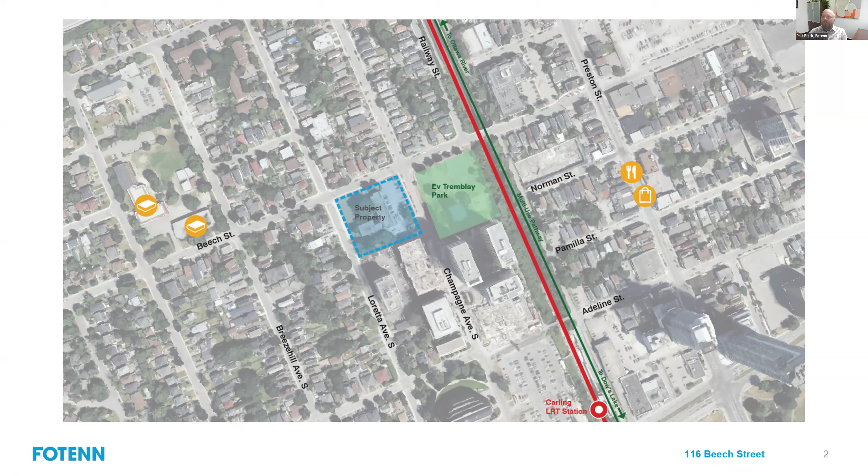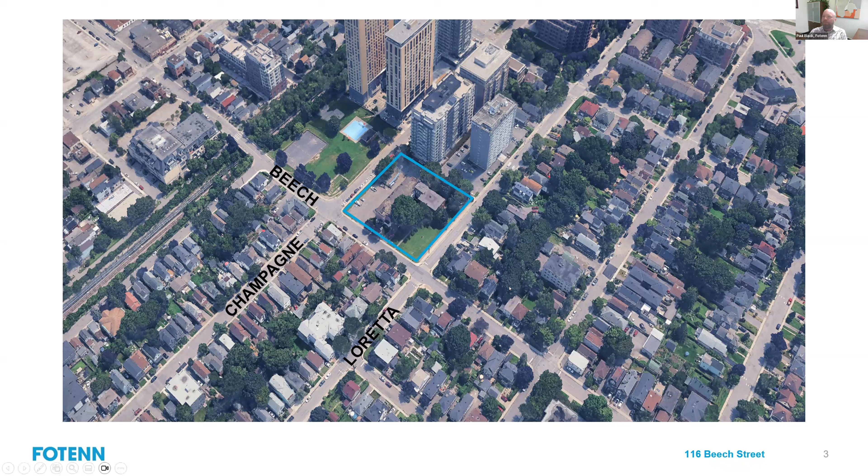Here's an aerial view of the site, just to give you a bit more context. In this case, south is to the top of the image, north is to the bottom. So we're looking towards the new Civic Hospital and the Carling transit station. You can see the recent developments along Champagne and the older high-rise along Loretta, which are just located south. And obviously you can see Ev Tremblay Park as well.

So in terms of the planning context for this application, I'm going to run you through that and a little bit of the rationale, and then Ryan's going to take you through the actual design of the project, and then we can open it up for questions. In terms of planning context, this site is located in the downtown core transect, which extends as far west really as Preston and these transit station areas. It is designated as hub in the official plan with an evolving overlay, which is that sort of confetti over the map.

The hub designation within that downtown core transect permits high-rise buildings, so that's up to 40 stories in the city's official plan within a 300-meter radius or 400-meter walking distance. It requires a minimum building height of 4 stories for any redevelopment. This site is about 270 meters from the nearest transit station, so it does meet that criteria for high rise.

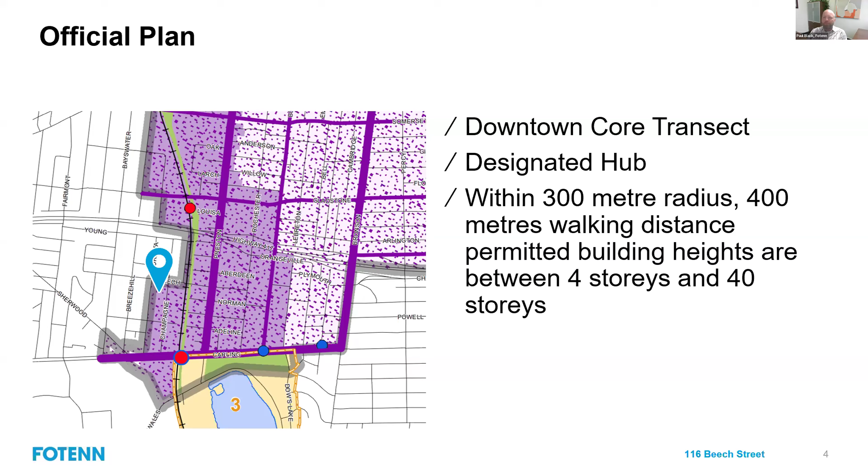But that's not a blanket permission. It requires that we meet the urban design objectives of the official plan as well, which speak to transition into the neighborhood. I'll circle back to that in just a moment.

An additional layer of policy in this area is the West Downtown Core Secondary Plan. Previously this was a more localized secondary plan, but as part of the official plan update in 2022, several plans were merged into one document called the West Downtown Core Secondary Plan. That 2022 update didn't really update any of the policies of those secondary plans. It changed some language to ensure references were correct to hub and that sort of thing, but there was no real hard look at the different plans to ensure that they aligned or conformed to the parent official plan.

So in this case, the site, you see it on the map here. This is an excerpt of the height schedule from that secondary plan, but it is within what's called the Dow's Lake Station District and within the hub area.

And the current permissions would allow heights up to 6 stories. So this brings us to the first application that's been submitted to the city, which is an official plan amendment to amend the secondary plan. It's not seeking to amend the parent official plan. The amendment to the secondary plan is rationalized by the policies of the parent official plan, which permit the greater heights.

But key policies of the official plan are to maintain transition to the low-rise neighborhoods, in this case to the west and to the north. You can see that blue dashed line that runs along Loretta and Beech. That's the neighborhood line in the secondary plan, and that's really intended to ensure that there is a proper transition from the neighborhood to this hub area, recognizing that it's going to be a denser, more developed area.

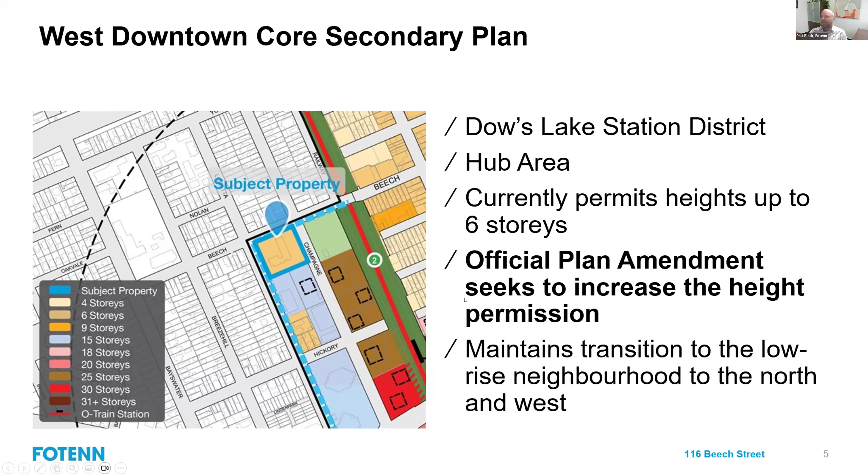In terms of the zoning bylaw, we submitted in December, so technically we're under the old zoning bylaw, which is 2008-250. Some of you are probably aware the city council just adopted the new official plan earlier this month, and the new zoning bylaw earlier this month, and it is now in its appeal period, so it will be coming into force at some point over the next months. But in the old zoning bylaw, the property is zoned R5B with a height maximum of 18 meters. That's what that R5B H18 stands for.

This brings us to the second application, which is a zoning bylaw amendment that's seeking to permit the greater building height, which is 25 stories in this case, ensuring those stepbacks for the transition through the zoning, and through a site-specific schedule that would dictate where height is permitted and what heights are permitted where. So amendments proposed include height as the main one, but also rear yard setback, which is along the south property line adjacent to 90 Champagne and 285 Loretta. Also adding permissions to permit retail use, which Ryan will speak to, but there's a small area allocated for some retail use to activate the park space.

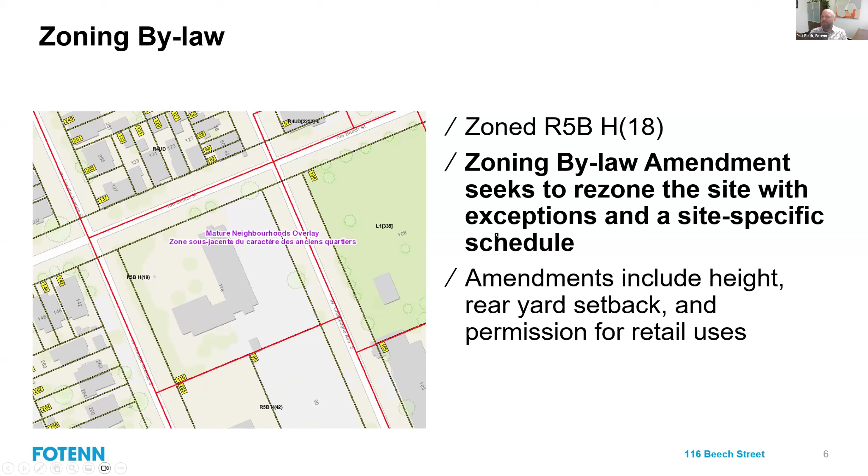In the new zoning bylaw, the zoning would still require an amendment and would still be amended through the zoning bylaw amendment, but the new zone has it as a Hub 2 zone, which is H2, with a maximum height of 20 meters - again recognizing 6 stories in the secondary plan, it was zoned for 20 meters. You can see the neighborhood to the north and west is zoned N4B, which is N4, a mid-density neighborhood, with the B subzone, which has higher lot coverage and smaller setbacks. It goes A to E, with E being the least dense and A being the most.

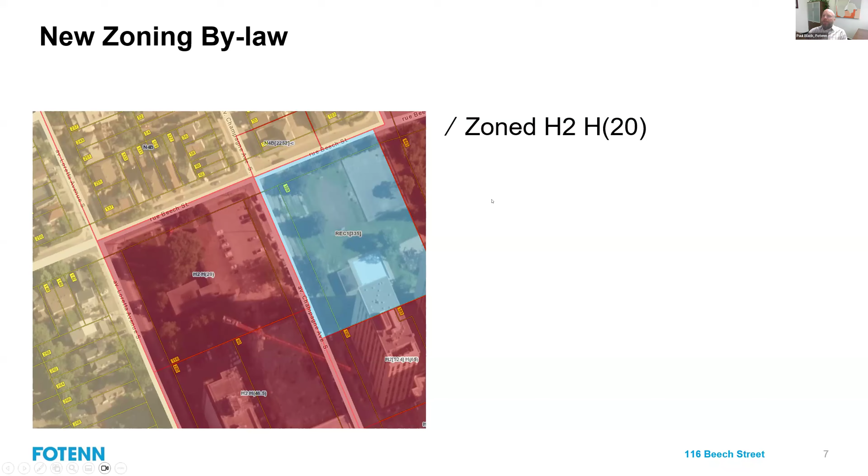In terms of key statistics, Alice mentioned some of these, and we're happy to revisit these as we go tonight. Overall, 392 units are proposed. This includes 5% large dwelling units, which the new zoning bylaw has defined as 3-bedroom or 2-bedroom plus den units that are 80 square meters or more. So 5% of the units within the building do meet that 80 square meter criteria.

And then the building height is 25 stories or a height of 78 meters. You can see here, and again Ryan will walk you through this, but not the entire site is 78 meters - the tower and the greatest heights are 78 meters.

113 resident parking spaces are proposed with 30 visitor parking, which does conform to the bylaw. And 204 bike parking spaces are proposed, so just over 0.5 per unit in this case.

And then there is a square you can see in the top right-hand corner. That's a public parkland dedication. Ryan will speak to that a little bit more, but it does represent 10% of the site area. It's been located in that corner to play off of Ev Tremblay Park and offer potential opportunities to animate the space with activities happening in one park or the other. That represents 498 square meters.

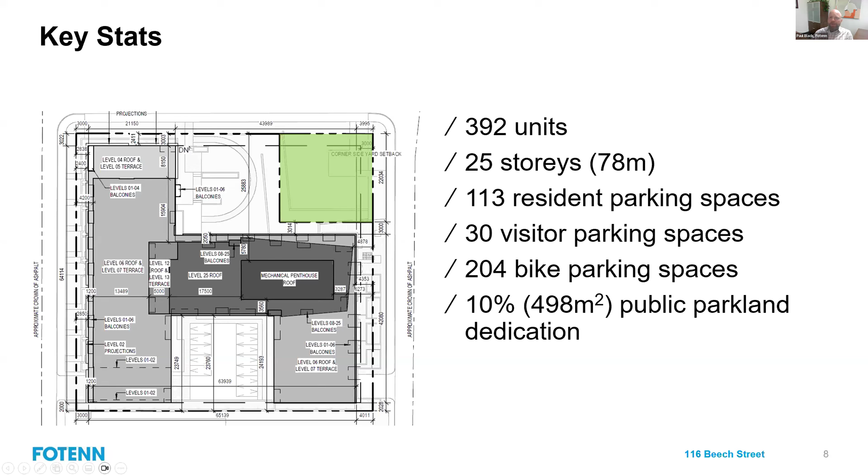So that will be a future process that we'll have to work through if the official plan and zoning bylaw amendment are approved. With that, I'll leave it there, and I'll pass it over to Ryan, who will walk through the design of the project. Thank you.

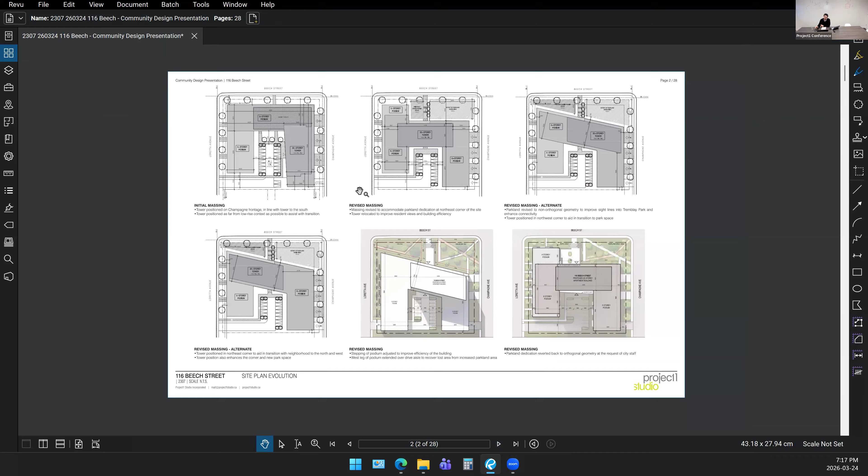I just want to start by going through the iterations we've taken of the project and how we've arrived at the current massing. So again, understanding where we are, understanding that we've got lower scale development to the west and to the north, our original proposal was a tower very much along the Champagne Avenue side, kind of abutting the tower that's gone in at 190. That's very much symmetrical and in line, and then imagining this building would kind of step down as we went around the corner, trying to the greatest extent possible to be respectful of these separations to the north and to the west.

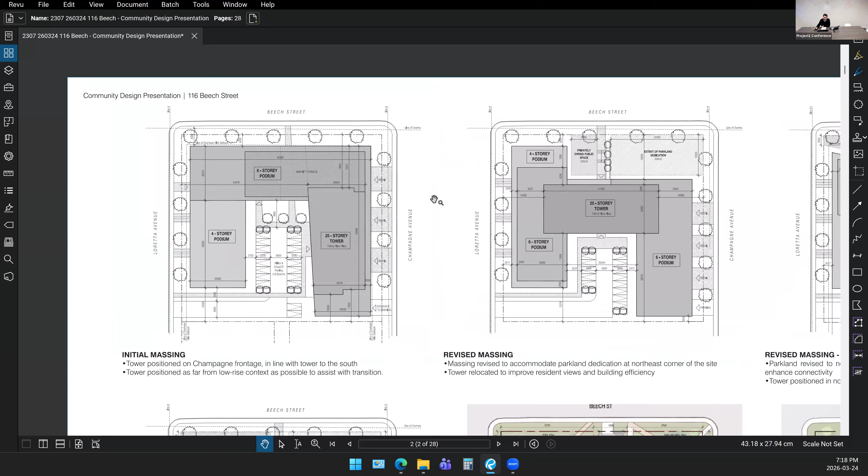But that got thrown for a loop once our initial meeting with the city happened, and there was this desire to pursue a parkland dedication at the corner, which changed the massing strategy around - we now had to provide space in front of the building along Beech Street, which rejigged how we could get the mass to work. So in this version we had a 25-story tower very much centered, rotated and centered on the project, on the lot.

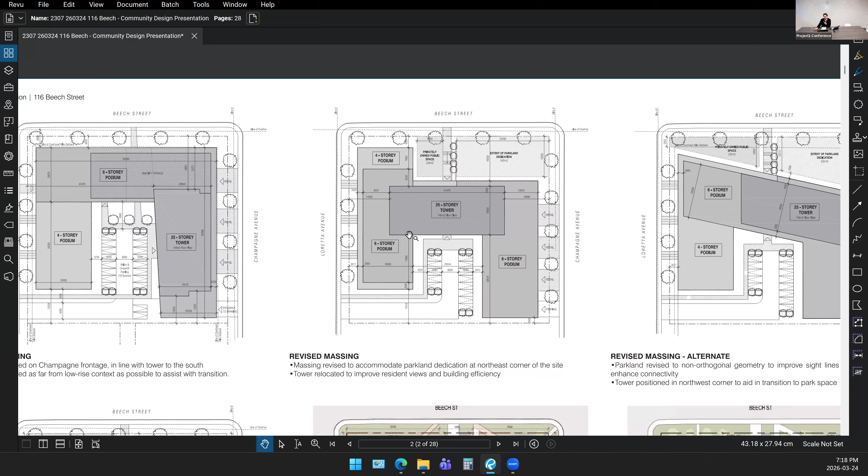And then we moved past there thinking, if this parkland is really about creating connections and links into Eve Tremblay Park, perhaps we don't need to go rectangular. Perhaps we could go with a diagonal or a skewed proportion so that it could help create this almost false perspective to open things up towards the park space.

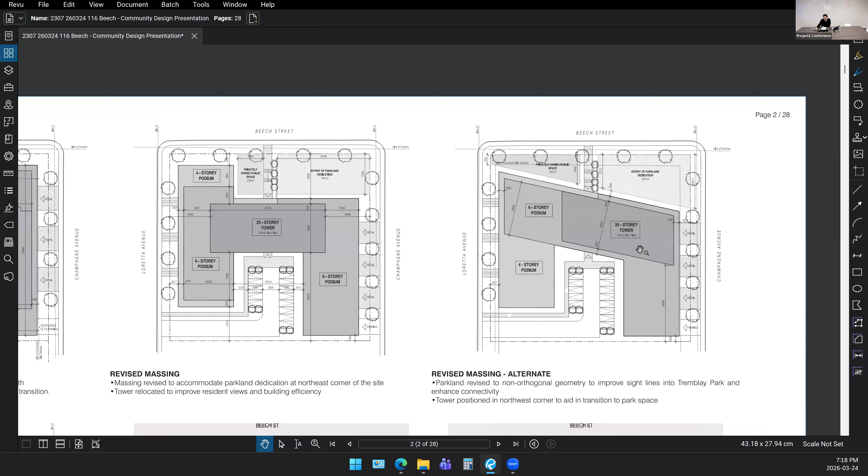And so we developed this idea, and this also allowed us to shift the tower a little bit further to the east and increase that separation. We actually pursued that quite a bit, ultimately to have this turned down by city staff over a preference for more rectilinear and square shapes for this public space. So that kicked us back to a shape closer to where we started from.

Flipping forward, we get this massing, which is the current condition of things. We've got almost like an H-shaped podium, and this is 6 stories in gray, what you can see here. Then we move up from there into the tower levels, so this dotted line represents the footprint of the upper levels of the building.

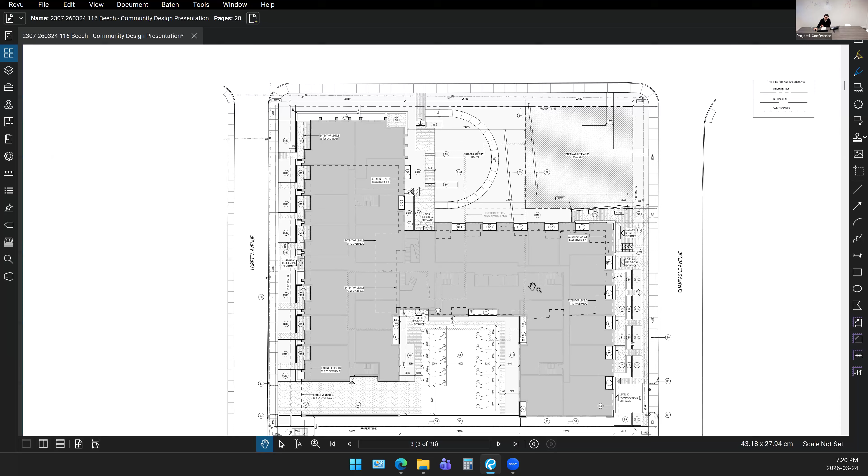Being mindful of our context, we have over 20 meters of separation from our property line to the edge of the tower portion of the building as we go to the west, which is double the separation requirement under the tall building guidelines, and even greater separation going to the south. As we translate to the north, we've got this entire parkland dedication, separating the tower and Beech Street and the lower rise community to the north. So we're really doing what we can to position this tower as far from Loretta and from Beech as possible.

We're also being mindful of things like the transition and change in grade that this project experiences. So the Champagne Avenue elevation is over a story lower than Loretta. We get this transition in height that happens along Beech Street, and as we go up Beech, we're climbing over 3.5 meters.

So what this means is that our parking entrance, the access to all of the covered parking, underground parking, garbage service, access to bike parking, it's effectively underground, but we don't need to go down a ramp to get there because we're at this lower level when we go through here.

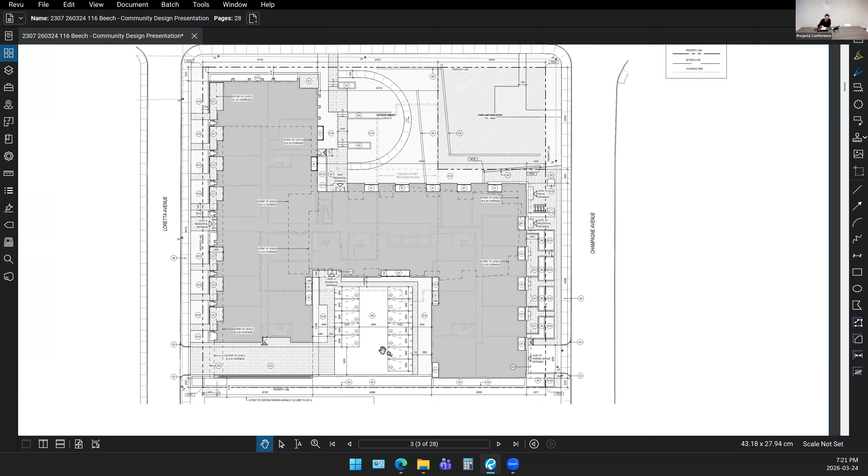And then we have an inner courtyard that we're providing here off of Loretta, so that all your Ubers, your visitors, your drop off and pickup, they aren't parking on the street. They aren't taking up parallel parking spaces on Loretta. They're able to come into the site. There's a number of parking spaces in here, and that's where your short-term parking can take place. We're not creating these bottlenecks along public streets that get even worse during the winter and even this time of year.

The other thing we're managing, besides the change in grade and the parkland dedication at the corner, is that we're also not developing this portion of the building. This is the 10% parkland dedication that we're providing. We're nearly doubling this green space dedication in front of the building with the way that we've decided to move forward with the project.

So there still is a change in grade here. From a public approach perspective, we're seeing this being a nice long processional route that allows for benches and a nice landscaped element, and then an interesting curved element here for a barrier-free ramp to provide access up to the main entrance. But the nice part about this as well is that we won't have building underneath the majority of this.

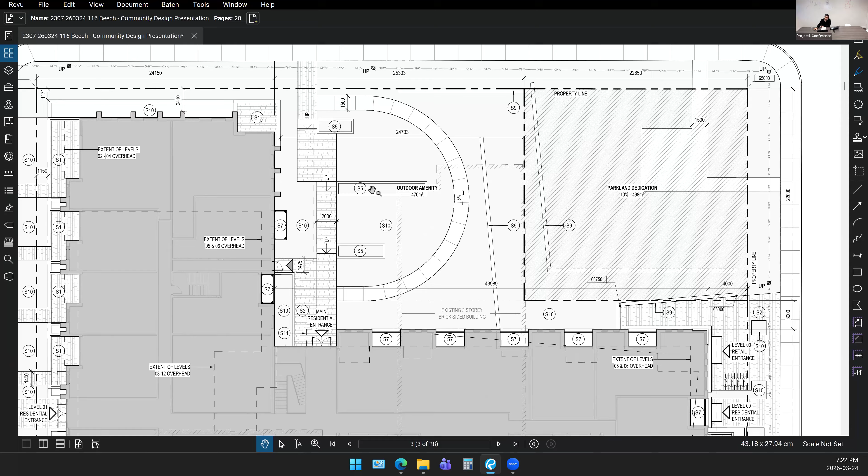So we were actually able to provide sufficient soil volume to provide adequate tree planting for this area. It won't just be shrubs that we're able to plant in here, we'll actually be able to plant some significant sized trees to really soften this edge and provide real canopies, actual shade, and really create a unique pedestrian environment in this soft landscaped area in front of the building.

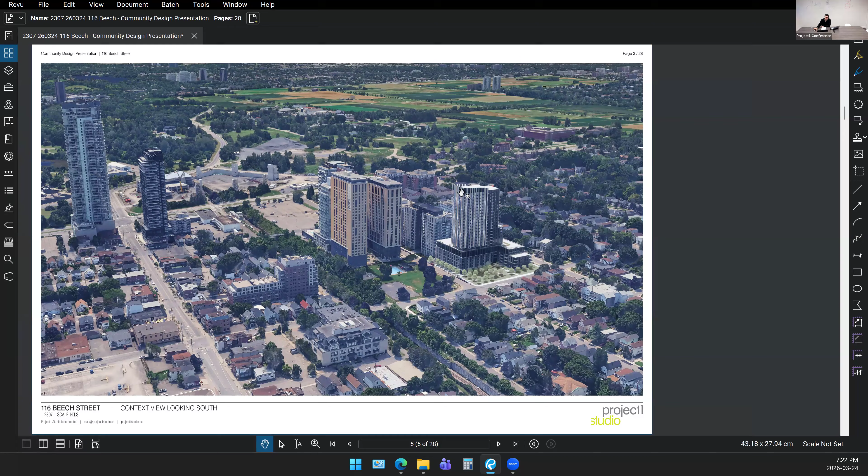Moving on from there, these are stats, we can go back to these if we'd like. We've done some analyses of the building in context. This is in existing context, we all know that there's tons of planned context for this area as well. But we can see here that green area in front of the building, the massing of the building in relation to the existing two MB towers that are here already, the abutting property to the south. We can see that in general, while this is more height, this certainly isn't outside of the norm, this certainly isn't out of keeping with the type of development, the type of density that we've already seen in this neighborhood.

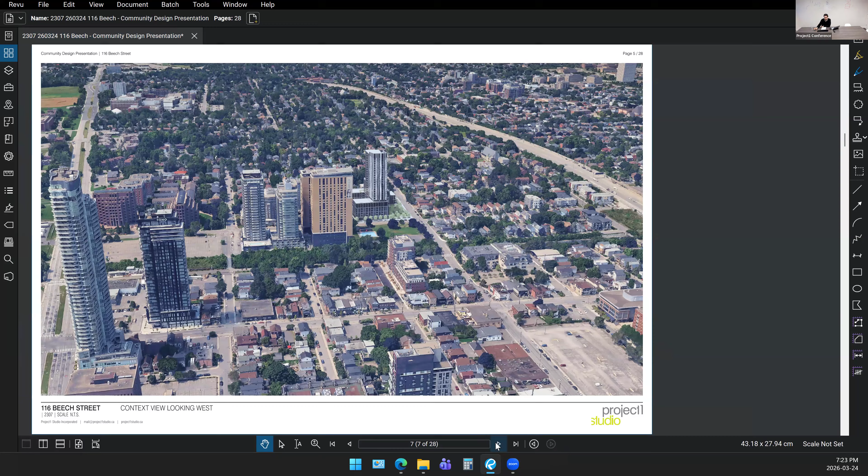And then as we move forward here, we can get into the design of the building itself. We're really looking at a couple different personalities to the project because we're relating to the different characteristics of the street, and then pulling that up into the tower area of the building.

Our first challenge was that with the tower portion up top, the majority of views of the building will be of the long face of the tower level. While we conform with the floor plate requirements for high-rise buildings, this is a long elevation to look at. So we wanted to break this up, and we've done this through this folded form veil that covers about half of the tower element. This works to break things up and complements the delineation of the building at the podium levels, creating a duality in the project that goes from the podium levels and climbs all the way up.

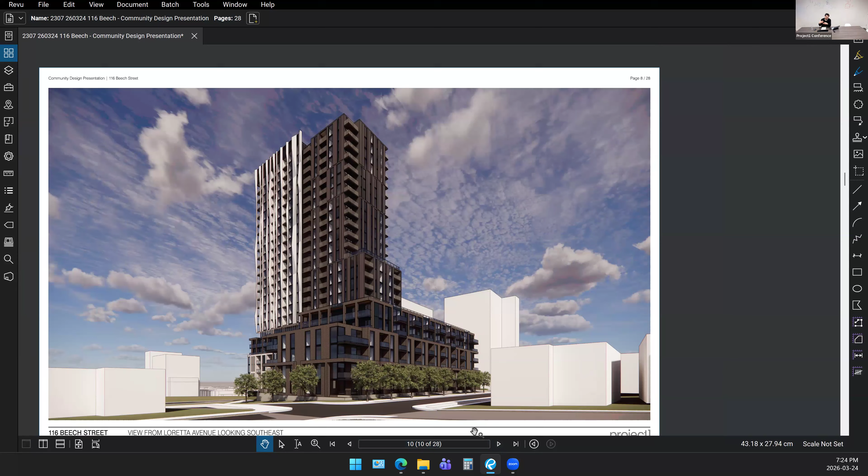Our strategy at the ground floor level is to be mindful of the vastly different character of Champagne and Loretta. Loretta is much more low rise in scale, with a lot more single family homes or duplexes, low rise residential development.

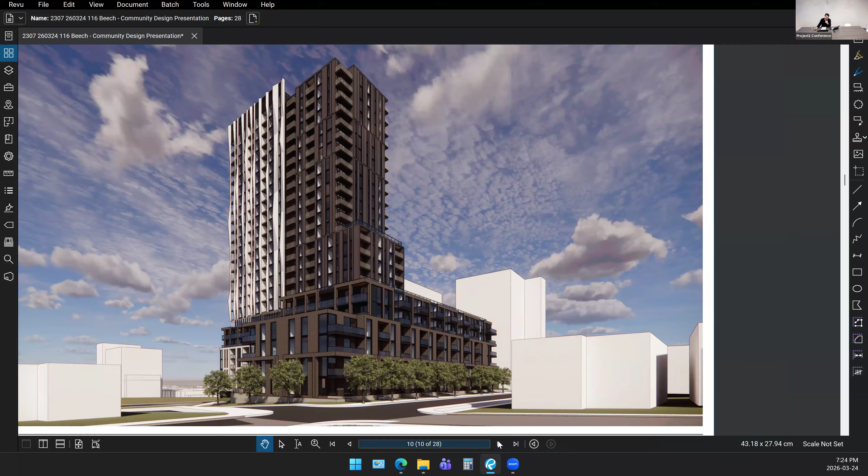Our intent here is to use a lower scale masonry, a brick masonry that refers more to the existing context we see across the street and in the neighborhood to the north or west, with a lot of articulation to try to bring that scale of the podium down. We've got horizontal elements expressed at the second floor level, and the building steps back after the fourth floor. So we're doing a lot to soften the expression of the building and create articulation to mimic the cadence we see across the street in the existing buildings.

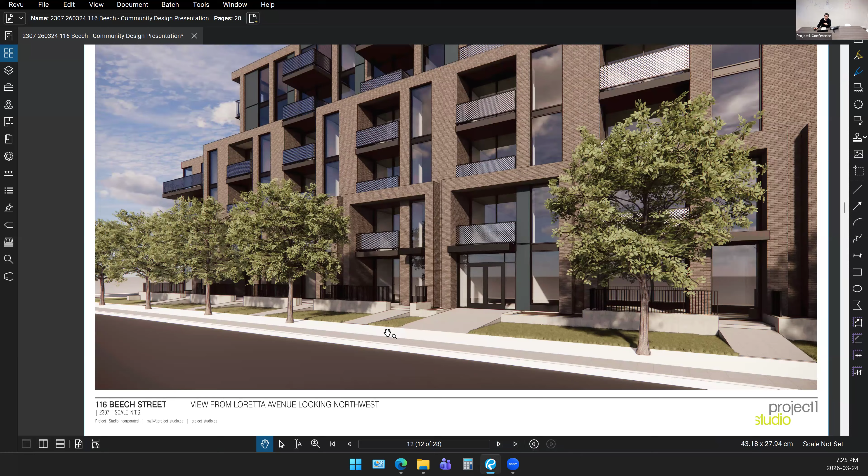These units are going to have at-grade connection. Every unit has a balcony facing out towards the street, and the ground floor units all have porches with direct street access. Doors to the street are a big thing for pedestrian connectivity and ensuring vibrant, active streets, so we've taken this to heart to promote integration and interaction here along Loretta. The building then steps back considerably before we start to go up into this tower form.

Now, going around the back side of the building, this is the inner courtyard I spoke of. This is where we get our drop off and pick up parking. We also have two access points for the main lobby of the building, and residential units that will actually face into this courtyard space as well.

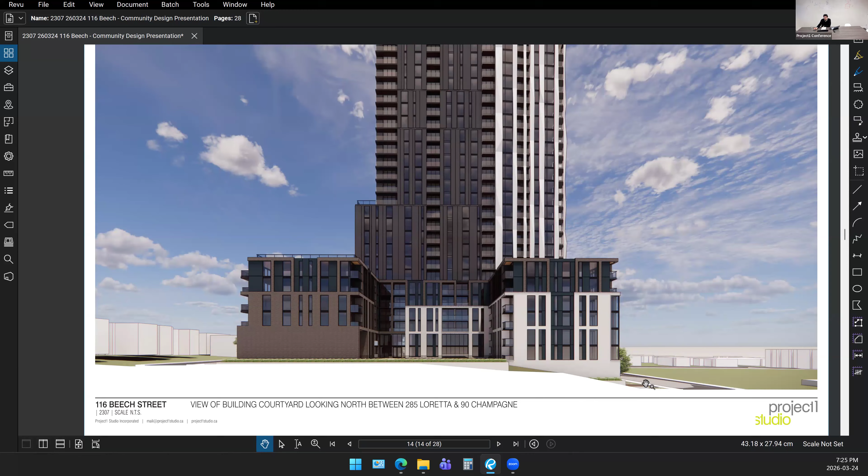What we can see from this image is the height of Loretta and then down to the lower level height of Champagne here. So when we're parking in our first level of parking on Champagne, we're actually underneath the surface parking in this courtyard that's accessed off of Loretta.

Going around, this is a view down Champagne. Taking a different approach along Champagne, instead of having all this articulation, subdivision, and stepping back, the other buildings along Champagne have very little articulation, and most of them don't even have podiums. So we have a much taller expression here to reflect the taller expression of the other buildings, with more density in general along Champagne, and this gets reflected in how we articulated and designed the podium levels along Champagne.

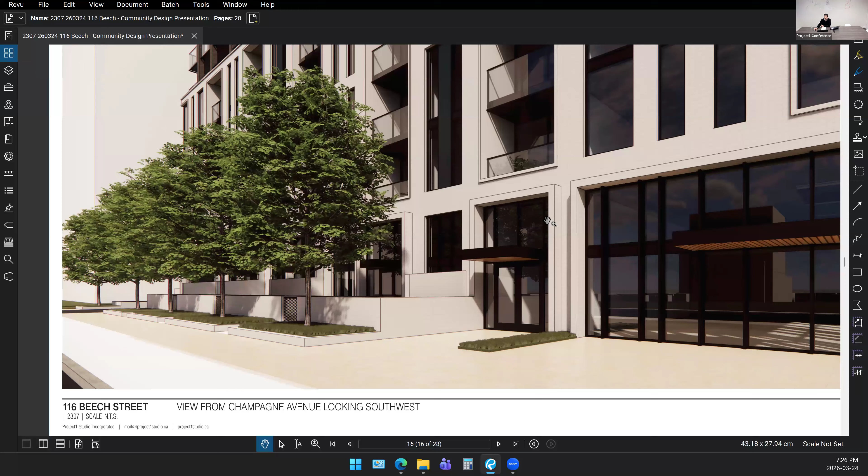Now we still have opportunity for at-grade suites, and we're working a little harder to create this separation and division so that residential units feel comfortable, private, and separated from the street. And then right at the corner, facing or adjacent to the parkland dedication, there's going to be a small retail shop.

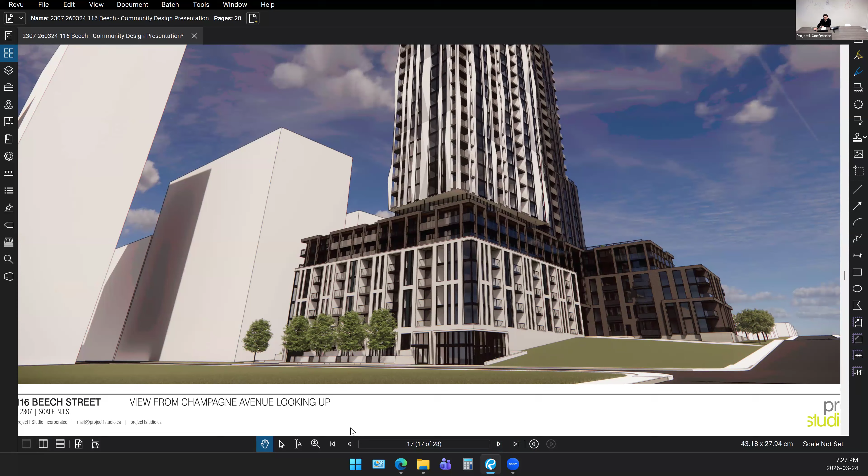So that closest adjacency to where this parkland dedication will be is where we're going to find this retail, acting almost as a bit of a kitty corner to Rienzo's, offering some community or commercial aspect to the neighborhood in this corner. And then we can see the way we've stepped up the building in the upper levels here, with an interesting way we've chosen to articulate the corners.

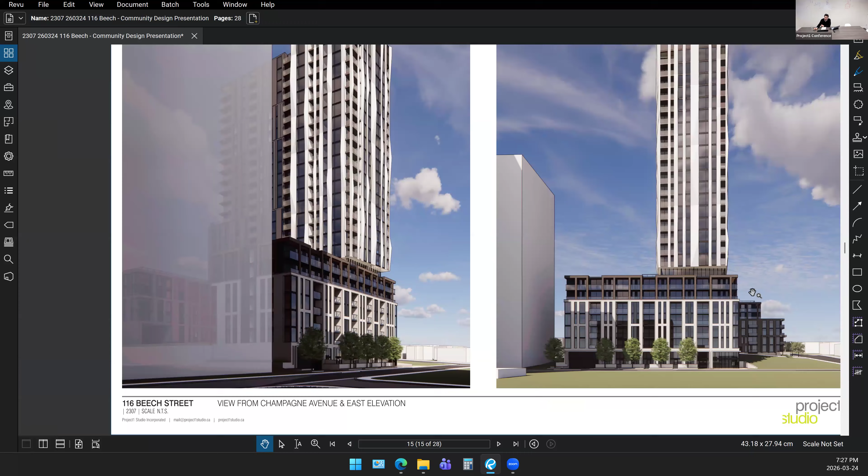I talked about the unique architecture and the folded ribbon effect that we have going up the building. So we step the building back to create this podium, and then we actually cantilever it back on the tower levels to try to keep it in plane with the podium elevation.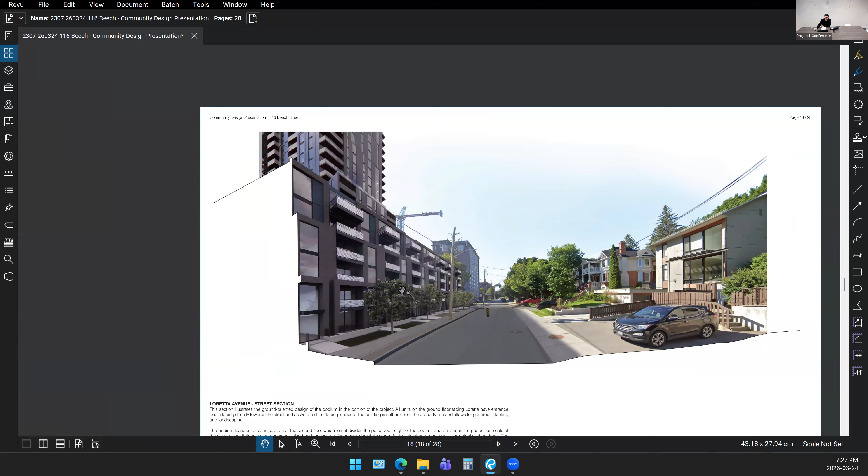Again, this is all about enhancing this corner and drawing attention to it as something unique, as a special feature for the project. These sections show the studies, the analysis we did in looking at the character of Loretta and how we can see this lower scale residential development in the neighborhood, and how the building has been designed to reflect this, where we have a lot of step backs and articulation.

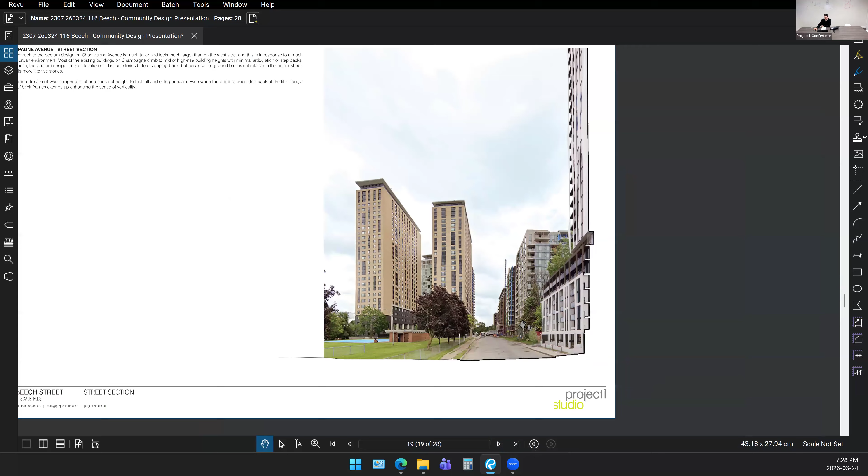In contrast, we look at the Champagne side, and we've got a number of high-rise buildings here that have no podium articulation, no deviation whatsoever as we get down. So we've got taller articulation on the proposed development, but we still step back for the podium levels before we do that bump out for the tower.

Quickly with the floor plans, we've got ample bike storage, which we could even provide more of, and a lot of resident storage as well. This is the lower parking level plan.

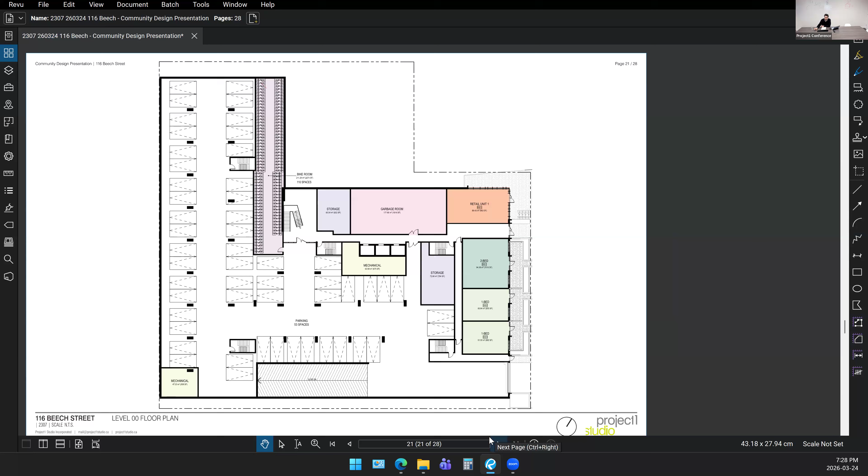The P1 plan, which is basically at grade for the Champagne Avenue side, has a few residential suites, and then we have that retail unit in the corner. Garbage is easily accessed, mechanical spaces - a lot of this is actually quite simple to get to. Garbage is going to support the commercial use as well. So this has been thought through, and it's very efficient from a vehicular traffic perspective and access standpoint.

And then as we move up, we've got this visitor drop-off parking here. We've got a very interesting plan for the resident lobby with these interconnected floor spaces and sculptural stairs, allowing these different levels to connect together.

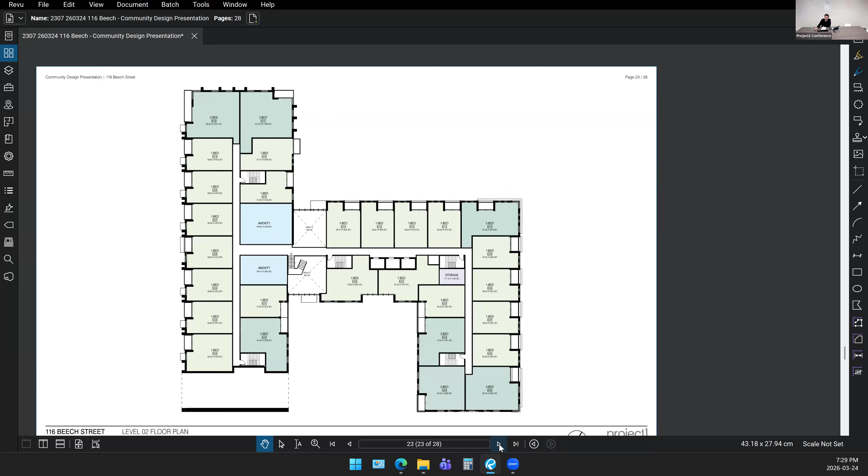And then as we move up, we have a good mix of unit sizes - two-bedroom units pushing 1,000 square feet, well over the 800 square foot threshold that Paul was mentioning. Large amenity spaces, this terrace in particular on level 7.

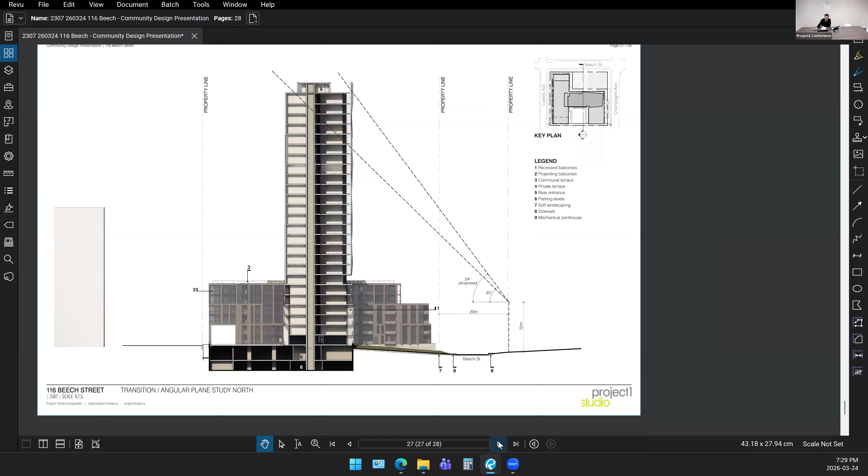And then we climb up the building with this kind of veil formed here that's non-orthogonal in comparison to the rest of the floor plate for the project. And then we move up from there. So we've done some angular plane studies to show tower setbacks and how the building is oriented on the site. But I think I'll park it here, and we're happy to take questions about the project.

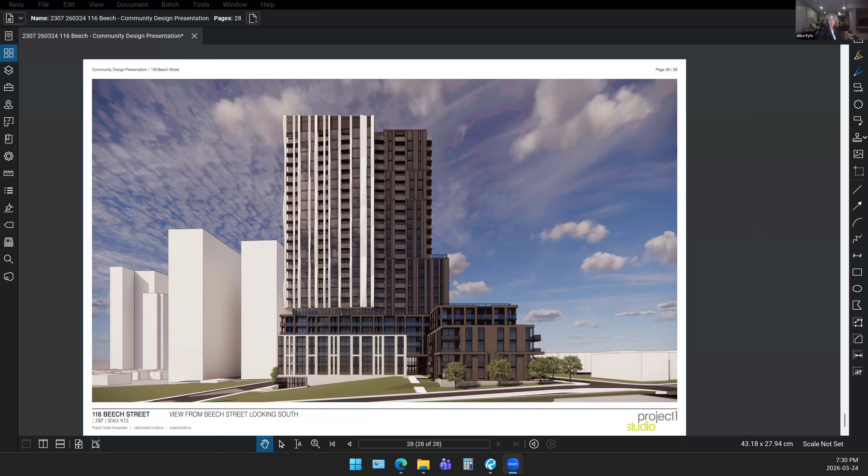Who wants to take that one, Paul or Ryan? Sure, I can start and then Ryan can jump in. Yeah, since the secondary plan was prepared and has 6 stories on this site, the city's official plan has changed a fair bit in terms of density. And those changes are driven by how the city wants to grow. So the city has ratcheted up their expectations of intensification even further from what was in the previous official plan.

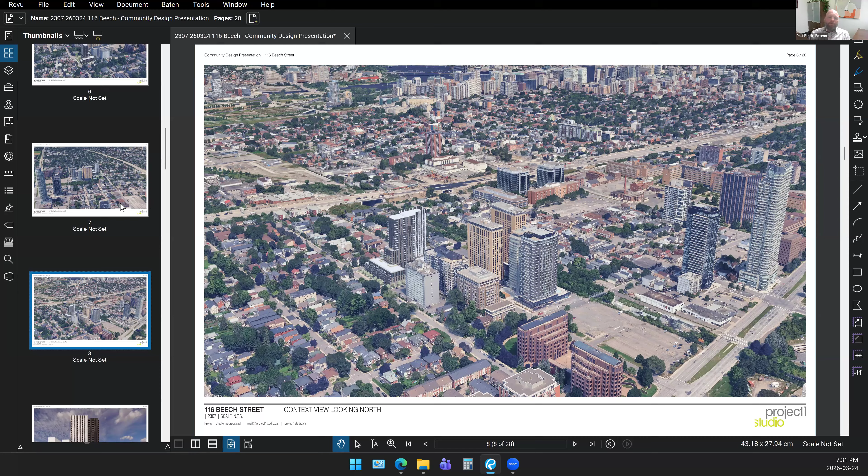And the provincial planning statement has been revised to speak to how those strategic growth areas, which are these hubs in Ottawa, are to be the real focus of growth. And so the policies of the official plan have changed, and we are looking at it not only from the secondary plan and obviously wanting to understand where the secondary plan came from, but we're also looking at it from the policies of the official plan of today and what they permit. And that's where the 25-story height came from.

So this is from an analysis, again, like Ryan showed quickly there, but the angular plane, the setbacks and stepbacks, and how we can, in our opinion, achieve an appropriate transition into the neighborhood, and achieve an appropriate scale along Champagne and along Loretta - that's how we came to the 25-story building height as something that we deemed appropriate.

Thank you. The next question is somewhat similar, and it reads: my question is about the secondary plan. Why did the community and city go through months of consultation to create a new secondary plan only to have the city override the plan in favor of rezoning from a 6-story to 25-story building? Do secondary plans mean anything at all?

Thanks for the question. The city hasn't approved the amendments to the official plan, so they have not made a decision on whether 25 stories is appropriate. We've put forward that we believe it is, based on the city's policies.

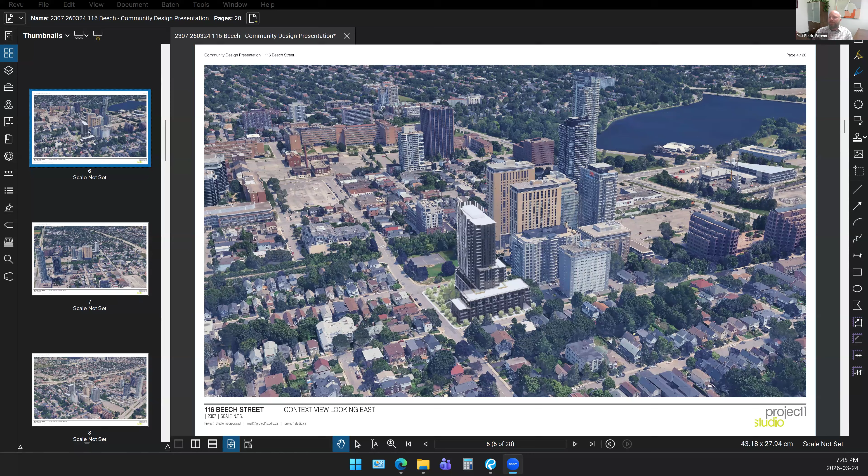That's Yves Tremblay Park. For the proposed park, there will be shadow impacts on that park by the nature of its location. As Ryan went through, we tried different locations for that park, but the city's preference from the Parks Department was this corner of the site. I hear the comment about investment into Yves Tremblay Park, but that's not necessarily part of this. That's a comment you could make to the city planner, the development review planner leading the file, to potentially have an impact internally.

There are funds available in an area-specific cash-in-lieu of parkland account that I haven't been able to budge city staff on, and at this point it will really be the next councillor who has to tackle that. But Paul is correct in saying it's not part of this project. I think if this project moves ahead with the parkland dedication on the west side of Champagne, with the potential to close the stub of Champagne for a few hours on special events so you can have markets spread across the two parks, that makes a really compelling argument for the next councillor to open up some of that cash-in-lieu of parkland fund and start spending on Yves Tremblay. I know they're thinking about it, but it just hasn't gotten underway yet.

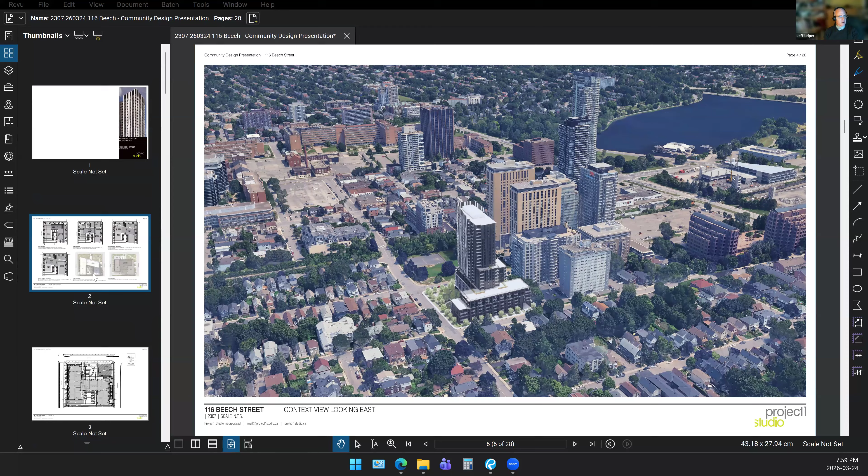How many meters is the step back? And Alice, when you're into the questions that you can see, let me know. How many meters is the step back on Loretta from the 4 stories to 6 stories? On the drawings, it looks like the step back is only a foot or 2. From 4 to 6 is a 2-meter step back. Okay, about 6 feet - yep, well, a bit more than 6 feet.

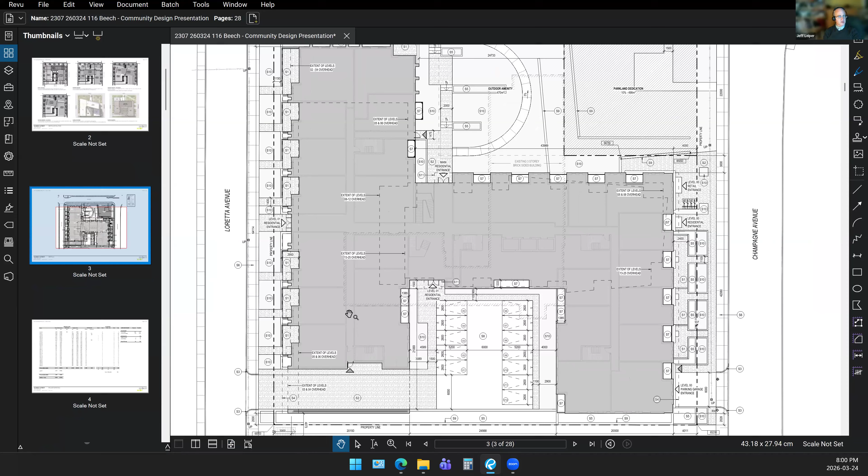Given the current housing that would be removed - and that's something obviously I want to chat with you folks about as well - is there any requirement or voluntary plan for affordable units within the new building? So this is something that we have been talking about, and we'll work through it with staff. There was some news about inclusionary zoning recently, but the city does not currently have inclusionary zoning requirements - they're really negotiated on a case by case basis.

This is something that, as the councillor mentions, we anticipate having future conversations about as we move forward through the process. There's no requirement in any of the tools that we have, and we're going to probably pass an inclusionary zoning bylaw sometime in the next couple of weeks that will have a 0% inclusionary zoning, just because the province has paused or prevented cities from doing that elsewhere in Ontario. But do you anticipate - I don't know what the programs still are from the CMHC - with financing terms that are advantageous if you put in a certain amount of average market rent or below market rent housing.

I don't know if any of your financing would be dependent on those, which would result in some affordability. Well, I think it's a bit premature at the moment as we're still working through the whole building and the whole concept. We have not gone into detailed financing at this stage. It's definitely something that would be explored, and what KTS would want to do is have more affordable units on the market, but I can't determine right now or tell you for certainty that that would be applicable for this particular site.